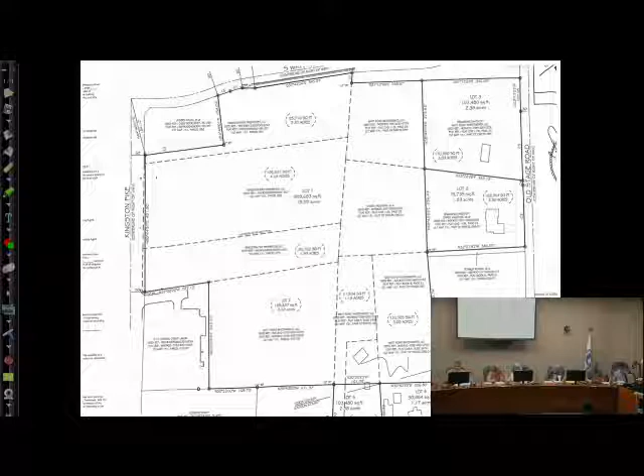Discussion and public hearing on a re-subdivision plat involving parcels 78.03, 79, 80, and 81, and part of parcels 95, 95.01, 96, 96.01, and 97, as shown on tax map 151, zoned PCD and R-1, 26.4 acres, Beginning Point Land Surveying LLC applicant. This plat is basically to combine parcels and portions of parcels that will become that planned commercial development recently rezoned a few months ago at the west intersection of South Watt Road and Kingston Pike. A small part of this is in Loudon County, very small, so it would actually have to be approved through Loudon County as well.

Another comment we had—the recommendations at your places are all doable, according to the surveyor. The one thing is, if they're not going to construct pedestrian facilities along Kingston Pike—in this case, there's a section where there is not an existing sidewalk, and the subdivision regulations require sidewalks or pedestrian facilities to be constructed along the frontages of all collector and arterial streets as part of the subdivision process. So if someone is wanting to request a variance from that requirement, you all would have to take separate action on that at this time.

The applicant has indicated to me that they will be constructing that sidewalk section as part of the site development plan for that planned commercial development. It's more or less that section just to the east of the Y-12 Credit Union and west of the Little Joe's Pizza. All the other frontages of this development have existing pedestrian facilities, even on Old Stage Road. So you will need to take separate action on that. As I understand it, they are requesting a variance from the subdivision regulations for that requirement at this time, with the understanding that it will be constructed as part of the site development.

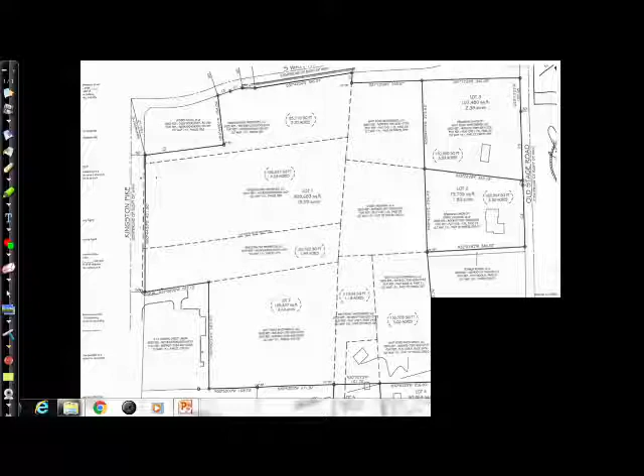Does anybody else have any questions or comments before we proceed? Applicant, could I ask? My name's Mark Balick, GBS Engineering, 1313 Calmia Road. I've already submitted the site development permit plans for next month for that parcel, and the sidewalk is included, if that makes your variance a little easier to swallow.

First you have to take action on the variance request, then we'll act on the plat itself. It's not unusual for us to grant a variance at this stage and pick it up at the site development stage. We did that with the Dollar General plat and with O'Reilly's, since they both completed facilities when they constructed the site, so it's not uncommon.

Is the applicant comfortable with the outbuilding that's on the new property line, removing that outbuilding? I think that's one of the clarifications, on lot 4 and 5. Looks pretty little, probably a little barn or something.

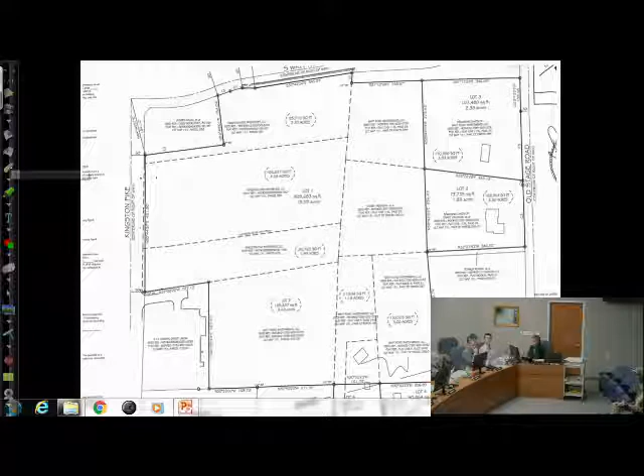Does anybody else have any questions or comments? And are you all okay with the stipulations? Can someone please say that in the microphone for me? Yes ma'am, we're comfortable with the stipulations.

I'm going to make a stab at crafting a motion to grant a variance that requires installation of a sidewalk at the plat. Did that make sense? In lieu of installing the sidewalk at the plat phase, the sidewalk will be installed at the site development phase. Is that a little more clear? Yeah, good.

Second. All those in favor? Aye. Opposed? And then for the plat itself, do we have a motion? Move for approval with the stipulations. Second? All those in favor? Aye. Opposed? Thank you.

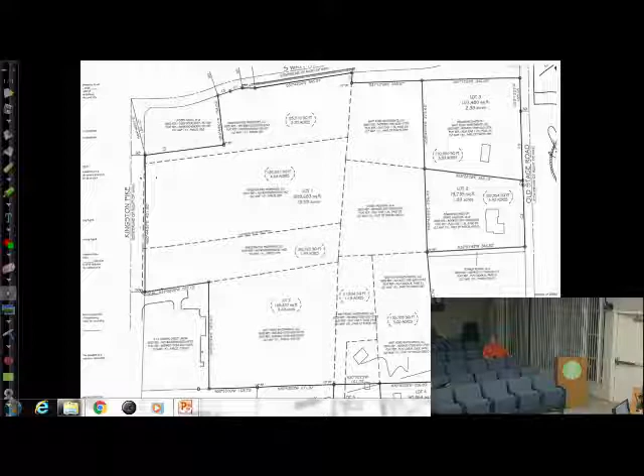Now we move on to item number 5, discussion and public hearing on a preliminary plat for the Old Stage Farm subdivision, parcel 105.02, tax map 151, zoned R-2, 5.64 acres, 9 lots, urban engineering applicant.

This is a piece of property, a small subdivision off Old Stage Road. It's sandwiched between part of phases 1 and 4 of Fort West, with house lots all around. There was a concept plan that came before you all back in March with a different developer, with a pretty similar layout. The property is currently zoned R2, and there's a different developer involved with this one.

They are proposing to construct a sidewalk on the east side of the street that would tie into a walking trail constructed to the southeast corner of the property, ending where there's a tiny corner of Fort West Homeowners Association property. That's why the trail terminates there, so that if in the future that subdivision wanted to connect Fort West into this development, that facility would be there.

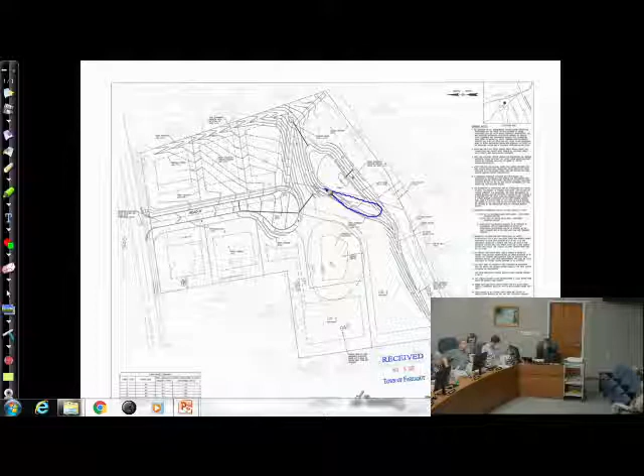What does the developer have to say about the overlay possibility? Have y'all had a chance to discuss that or review it? Chris Sharp, Urban Engineering, 11852 Kingston Pike.

We have—I mean, we'll take the time to explore an OSR overlay. It'll just be a matter of whether or not the house plans basically make sense for my client, and they may or may not. I haven't evaluated that yet. As far as the detention easement being on the private lot, I feel confident we can revise things to eliminate that concern.

That lot's a pretty big lot, so you should be able to tighten it up, since that's really just where your driveway is going to be anyway. Tighten it up right there, and it still has plenty of buildable footprint for your house. I missed that too on my end, to be honest. It's not prohibited, but we've found it's not a good idea to have those detention areas on part of a house lot, because people are ignorant about what that is and what their responsibilities are, frankly. So it's better to try not to do that.

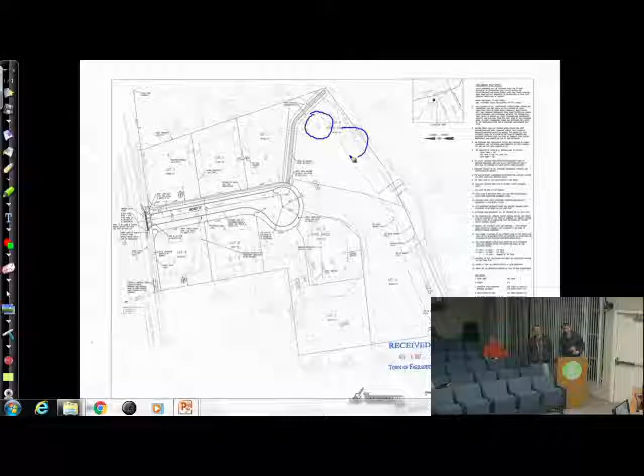What about the trees? Our focus initially was on two trees down near the southern end of the property, where the creek is the property line. My initial focus was saving those trees, and I think our grading efforts will stay out of the drip lines of those trees—they're large, I don't remember the diameters, but I can't hug them. Ideally, we knew that was going to be a common area where stormwater was, and it'd be a nice opportunity to create kind of a park setting, some common area that could be an amenity for the development. That was my primary focus.

The one closer to the road on lot 2 will be more problematic because we have topographic constraints. Not saying we won't try, but I don't know until I take a further look at it. You talking about the cedar tree?

No, ma'am, the one next to it, the big oak. There's a tree? A large oak tree. It's a really amazing tree. I was surprised - when I went out there, it's massive.

There's quite a bit of elevation change between where we're proposing the road and that eastern property line. So I can't make any promises, but I promise we will look at it.

Well, the reality is when you want to build a house there, that tree's got to come down. You're going to be in the drip line of the tree. It just is what it is. I remember the gigantic tree that was at the entrance of Wentworth for years, right there on the first lot on the left. It was a magnificent tree, but it's somebody's lot.

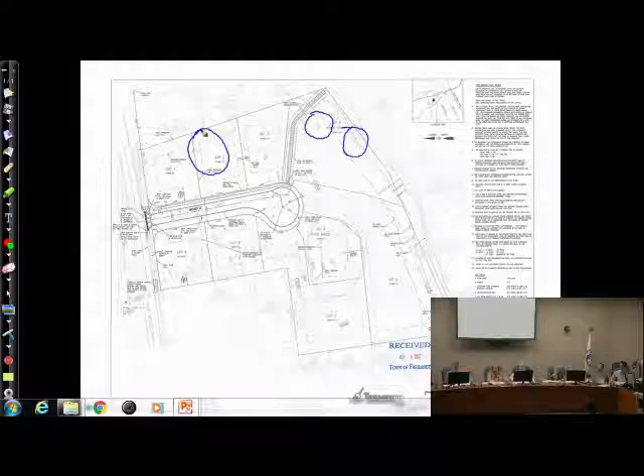Been there a while. We're Ray Keeney with Ray Keeney Construction, 12422 Union Road. We'll try to design a house plan around it.

We're working on house plans now, and that's why we didn't want to go. We'll look at the OSR, but we've really already got house plans kind of designed for it that work really well on those lot sizes. But we'll look at it and have Chris draw something up and see.

That's not a cheap tree to remove, whether you're doing it pre-construction or post-construction. It's still going to be an expensive tree to take down.

It's a great tree, and it'd be great to save it. I'm sure it'd be a selling feature.

You got an arborist involved to maybe give you some advice during construction. A lot of times you can go almost halfway into the drip line if you have a plan by an arborist to help, and he may look at it and say it's got some serious health problems that I don't see.

Well, he's right, Mark. Sometimes those arborists can say, hey, if you do some root pruning, there's certain techniques they can use to prune those roots so you can get in there. Now, if you're trying to put a big basement in, it just is what it is - you're moving a lot of red dirt.

But we'll kind of leave that up to you. Obviously, we'd like to recommend if any way you can save a big tree like that, you should. I think you've done a good job trying to work around that.

A lot of folks have looked at this with that sinkhole and trying to figure out how to make it a nice little neighborhood, and I think you guys have done a good job. And quite frankly, I kind of like your tightened roads, a little bit smaller roads, and that's kind of what we've talked about as a planning commission.

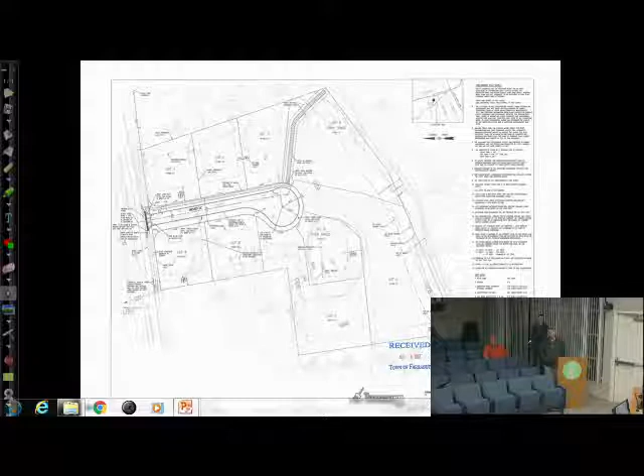Well, the reality is you're already compatible with the zoning. You've designed within the constraints of the zoning, maybe with the exception of the road width, so it'd be really tough for us to just say no, you can't approve this tonight. But again, we'd like for you guys to spend some serious time looking at it. It would reduce your lot size and maybe increase your density, you might be able to get a couple extra lots in there. Again, you'd have more open space, but you've got quite a bit of open space already. We just want to make sure you have the option, we'll leave that option up to you.

Any other questions? Are you okay with the subject-tos here? I have one more question. I'm curious as to why you selected Lot 4 for open space.

Probably for the detention, I assume. Yes, that's correct. The large stormwater detention pond is on Lot 4. Isn't that just generally the low part of your property? Yes, that's correct. Water wants to go downhill, so that's where most of that pond's there. The trees are right there too.

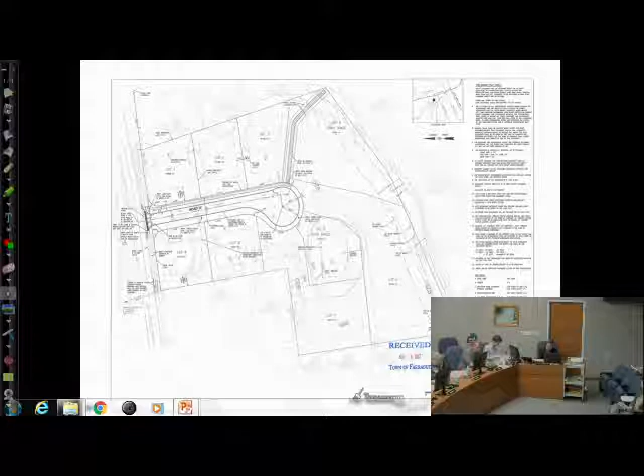Any more questions or comments? Requesting the variance for the street width because the street cannot be connected, it can't be extended, so your traffic counts are not going to change on it because you already have a build-out condition around it, and it's short. You're only looking at at most 70 to 80 daily trips on that street section, and so that's why they're requesting the more narrow lane width.

Because of the context of the setting, which I personally support their request for the variance for those reasons, I think it makes sense. Are you and the fire marshal satisfied with it? Now that it has a mountable curb, where they can actually get over if they need to get around. Yeah.

Any more questions or comments? Do we start with the variance? On the variance, anybody in the audience have anything they wanted to add or questions about this particular agenda item?

Then I'll take a stab at this variance, maybe I'll do better than I did on the last one. How about a motion to approve the variance to permit 11-foot lane widths rather than 13-foot lane widths? Second? Second. All those in favor? Aye.

Aye. Oppose? You need to have a reason. Reason being is the short distance of the road, the traffic count, and the inability to connect that road to another road in the future because of the context. This might be a little less wordy. All right, I got it.

Okay, have a motion on the preliminary plat. I make a motion that we accept the preliminary plat as presented, with the understanding that you will look at the possibility of the OSR and come back if it's feasible, and subject to acceptance of the subject which you agreed to, correct, and noting the mountable curb as shown on the drawing, it is on his revision. I'll second that motion. All those in favor? Aye. Oppose? Thank you.

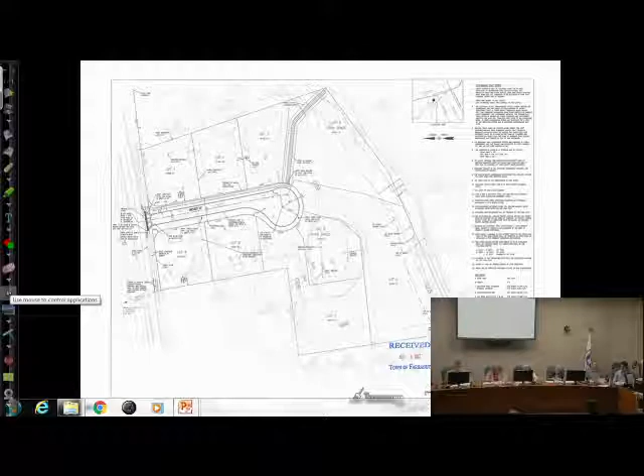Item number 6, discussion and public hearing on a request for a right-in, right-out access onto Kingston Pike associated with the new office building at 12640 Kingston Pike, Zone C-1, 0.68 acres. GBS Engineering, Mark Balick, applicant.

This item relates to our driveways and other access ways ordinance in the municipal code. As you know, access onto non-local streets, streets that are collector and arterial, have to be approved by the Planning Commission and the Board of Mayor and Aldermen. One of the objectives of that ordinance is to have better control over access points on heavily traveled streets for safety and functioning reasons.

This particular site was the site of a former Weigel's convenience store. It's at the east intersection of Way Station Trail and Kingston Pike. The lot is substandard in size, less than an acre. It has about 160 feet of frontage on Kingston Pike and about 170 on Way Station Trail. The site plan will be the next item on the agenda, and it's shown on the screen there.

They're proposing a small office building on this property, utilizing the relaxed front yard setbacks that we have now in the C1 that we provided for a few months ago with some text amendments. As part of this, they're also requesting a right-in, right-out access onto Kingston Pike.

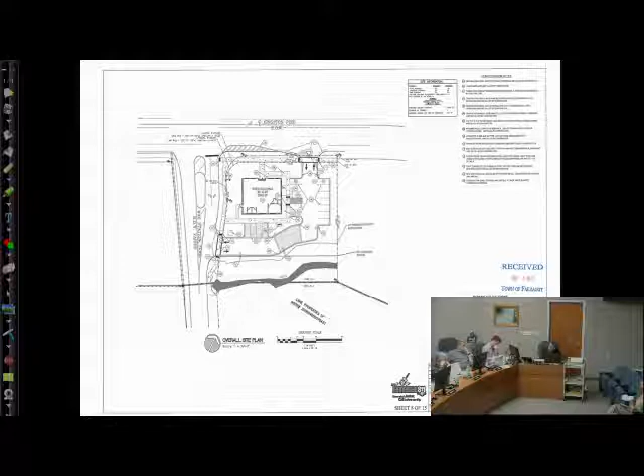It's a conflict with what will happen on the north side because people might turn out right, but then turn immediately left to get in. Maybe they're trying to avoid some stacking on Way Station. He had a concern about having any kind of access there because of its proximity to Way Station and what might happen when that's signalized on the north side.

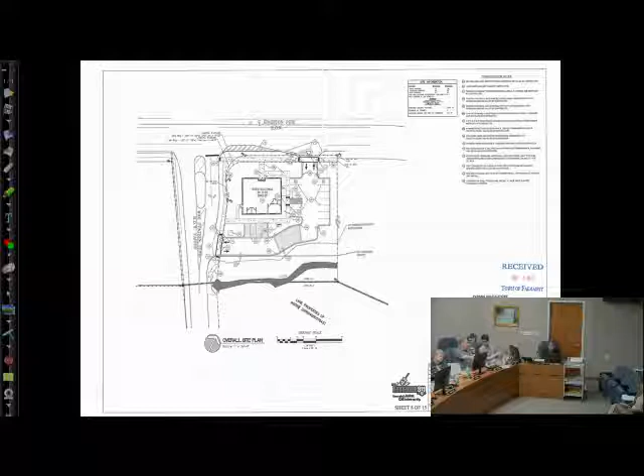What he's concerned about is when people break the law, not following the rules, and unfortunately people are going to do it. I see people turn, believe it or not. I about got hit by a guy turning out of Brookline onto Kingston Pike, right by the China Pearl.

Somebody was trying to exit there. Wow, so you can't design for that. You can't fix stupid. But the access point I envision, them coming out right, going east, is going to be a problem — immediately trying to get over in the left lane and make a U-turn to go back west.

In that curve. So you're saying Daryl's not comfortable with any kind of design that even allows an egress there. It just seems like it would help, like a fire truck or ambulance, or deliveries — I asked him that. I didn't really know either, but he wasn't comfortable, just because of its proximity and the future condition of that intersection. Plus, as Rita's already pointed out, the precedent setting.

All of these other issues matter to me, but the precedent setting is substantial — that would be a variance, and I don't think we want to put ourselves in that position in the future.

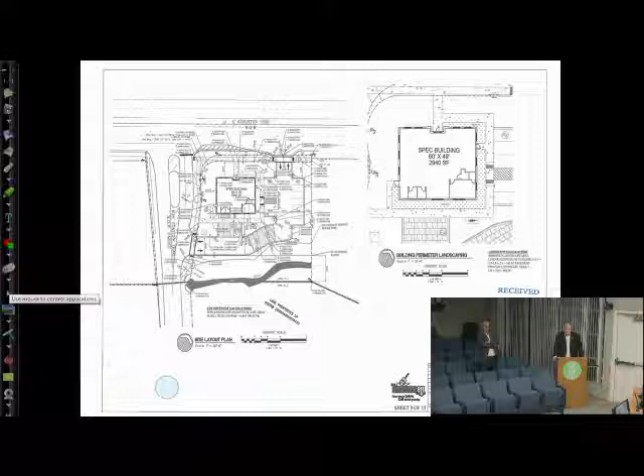How would you introduce debris into it? Just like the downspouts is probably the only way—like the gutters or downspouts—that'd be the only way I know of. It's not going to go through the porous paver. The porous pavers will let some fines through that can fit through the gaps and the porosity of it, if it's like a real fine clay, that may get some down in there. But the chances of it getting all the way into the chambers is very little, because it's got to go through the stone first—it's got to go through the porous pavers, then the stone, and then it's got to come up into the chamber.

But it does make it a lot better and safer designed from a standpoint of inspections. And the vendor has asked me that once we get this installed, to write a paper on it, because the city of Chattanooga is looking at this as a possibility of something they would recommend. Are you implying that you'll probably go with the Terra Arch then?

Yes, I'm probably going to be changing to the Terra Arch. It's exactly the same—the calculations are exactly the same. It's just a different product, that's all it is.

Sounds like a superior product. It is a little more expensive though, too. But the nice thing about it is, from a construction standpoint, you eliminate the possibility of the chambers crushing during the filling of the stone, and you add the additional advantage of inspection, the larger port—because with StormTech, the biggest inspection port is 12 inches in diameter, so the only thing you can get down there is a camera to inspect anything.

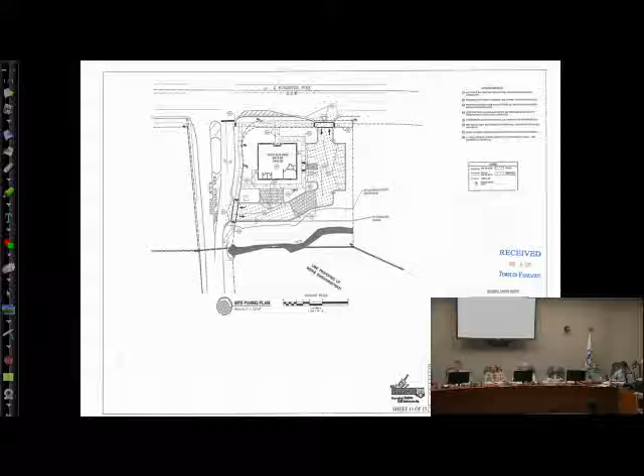We first came with a site plan of totally redoing the Weigels building in place, and totally redesigned it. I didn't bring pictures of it, but it actually was a more attractive building than this. But we had a little bit of disagreement on the definition of building with the BZA.

Well, they said anything under roof, and then they said the canopy was not under roof. So that caused a problem. And so then we came back with this other option, doing something additional on the front.

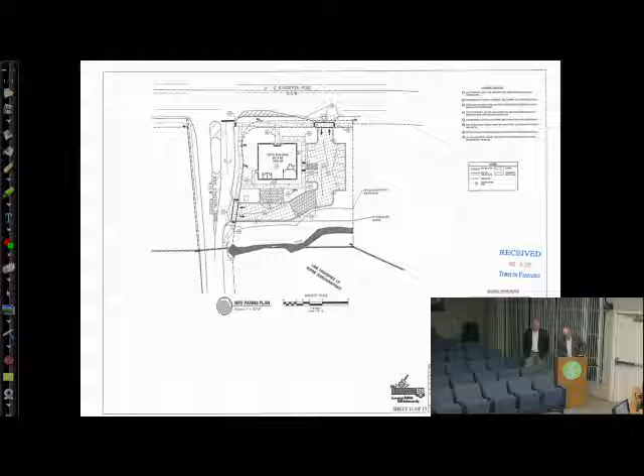Along the lines of this, I may approach. We're not that formal, Trent. Yeah, I had one question.

That was kind of a recommendation that I had as staff developer. Was this something that your client is - that's exactly what my question is - is that something you guys are comfortable with, architecturally?

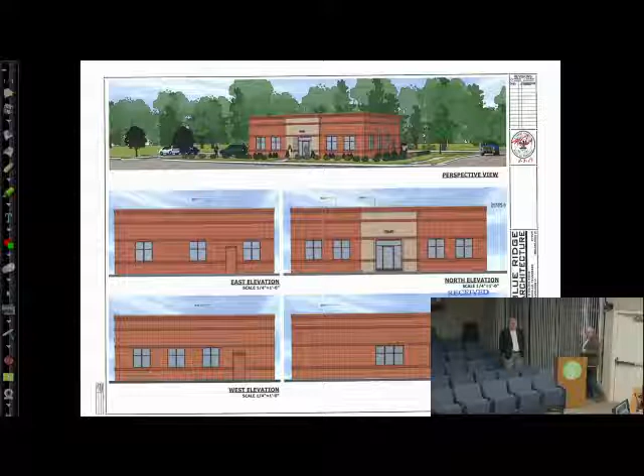What are your thoughts about that? Architecturally, we're fine with it. I mean, it's not a big deal. So that breaks the monotony.

That's exactly what my question was going to be, because in your plan, in our package, it looks like it's inset and still straight across. No, this one gives us some relief.

Well, I'm looking at the drawing, and I certainly know how to read the drawing. It sticks out 4 inches. No, right here, it doesn't. He's talking about - you guys are talking about two different things.

Ed's talking about the parapet. I'm talking about the brick - each side of that setback sits out. The white brick sits out. And then Ed's, I think, talking about the little alcove.

It's in a different plane, and then it goes back into a little alcove. I see what you mean, but you've also got the cap - I don't see it drawn - that's up higher, isn't it?

Yes, I like that because it would break the monotony of it coming across straight across the front. Exactly, it seems to me this is exactly what my recommendation would be.

And I think to me it gives us just enough relief, an iconic element, so it doesn't look flat across. Okay, I mean, we have no problem with doing that. I'm happy with that. It gives you a little bit of oomph.

Did you guys see that? That's much better. That will need to be given to Mark because we'll enter that into the record, so it's important it ends up down there at Mark Shipley's, because that's part of our approval process tonight - know what I'm looking at on resubmittal.

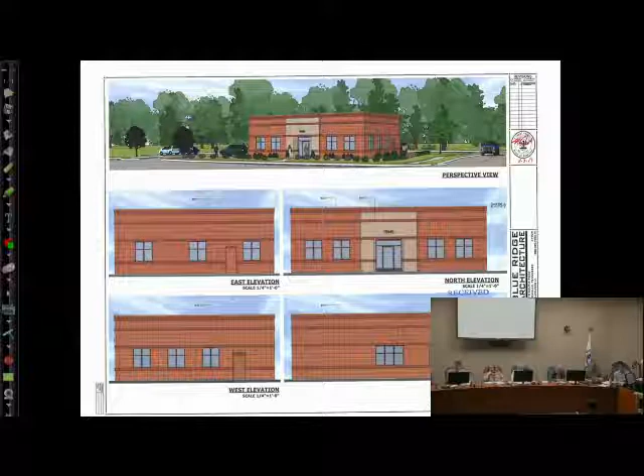I think we're past architecture. You guys want to talk connectivity? Connectivity with your neighbor to the east, or what may or may not ever be developed there? Well, I'll talk about that just a little bit, real briefly.

So you got to look at the context to what they're asking, to not have a connection in the context of this site. Because, as Mark shows in this handout, the property to the east, which is actually about over 9 acres, goes all the way up the hill and backs up to Old Stage Hill subdivision. But there's a stream that runs in behind the Weigels property, and then it kind of goes at an angle as you go to the east.

Let me see if I can draw. I'm just trying to outline what their logic is. But it kind of goes at an angle. We gave everybody a map right here. I just want it for the public, since they don't have the map.

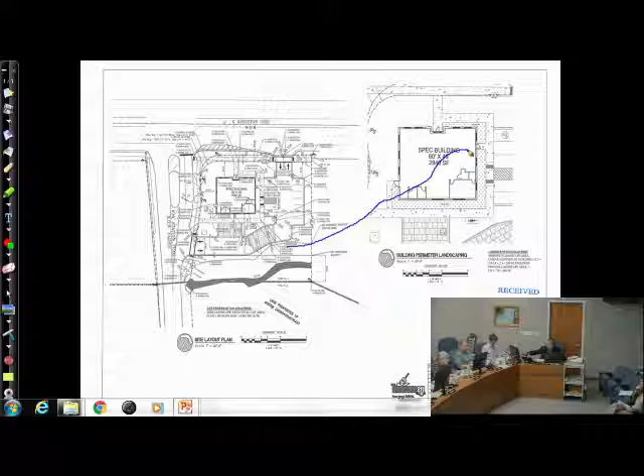So it goes at an angle, leaving you with, at least on the north side of the creek, a very small area. Once you figure in all the aquatic setbacks and lose everything, it's about 2/10 of an acre. Very difficult to do anything with. I'm counting contour lines in there, and there's nearly 100 feet of fall from the top to the bottom.

I can't conceive the day that this would ever be developed. Not to say that it can't, but it's cost prohibitive to develop due to the topography. And really, the way those dash lines are, they actually show a sinkhole. Now, it may have an opening because of the culvert down there, but those hash lines are showing closed contours.

I think in the context of the setting, staff is not opposed to not having a connection here, because if you look at the bigger picture, if that property to the east ever develops, realistically they're going to have to try to get access into Way Station Trail on the south side of the creek. So I don't really see that little triangular area as anything happening to it. The only benefit it could possibly have is for this property to acquire it and incorporate it into theirs, but that's the only entity I see it has any value to.

Well, that's not my decision to make, I'm just pointing that out. I think given the context of this setting and what you're connecting to, there's a reasonable argument for it not being required as part of this site plan. I agree as well. We would never allow a lot that small to be individually platted. And if the applicant wants to purchase that from the owners next door and come back with a site plan at a later date for extra parking, they could do that. But I just don't see a need for an easement that's just useless.

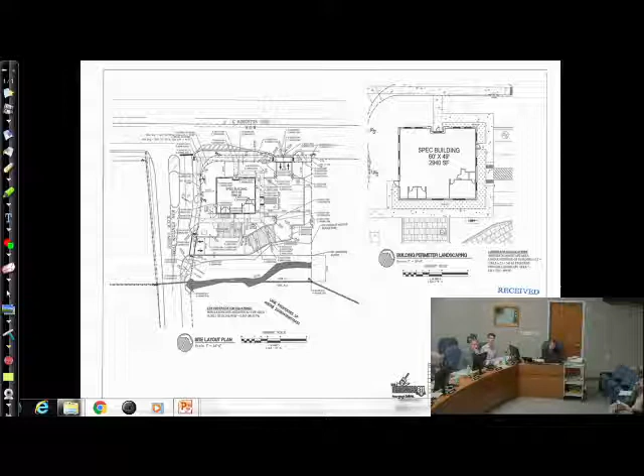Does that require a separate action item, Mark Shipley? No, it doesn't require a separate action item because it gives you that flexibility for it to be context based.

Any more questions or comments, or anyone in the audience have a question? I don't know if there were any other discussion points other than the staff subject-tos, and we're okay with that, included in that. I mean, obviously the issue of the right-in, right-out will have to go in front of the Board of Mayor and Aldermen, but if it gets denied, we'll work around it and keep going forward, try to get it approved subject to.

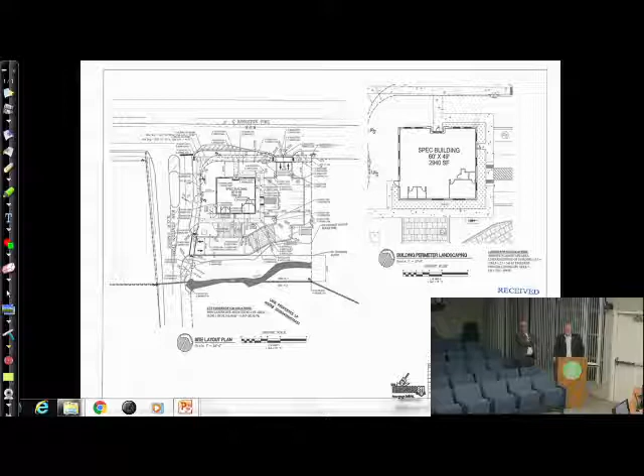We still feel it's a life safety issue that we don't have two means of egress out of this site.

We give up the right-in. Understand, yeah, that can totally go away, that's fine, but being able to get out, get fire trucks around, ambulances around. Well Trent, keep in mind your application was for a right-in and a right-out, and that's what we denied, as presented in your plan. Yeah, which we would probably come back with just a right-out. We understand, you'd have to go back to them, wouldn't you? Otherwise we're agreeable to all the rest of the subject-tos.

Okay, any other questions or comments? Mark, do we need to change anything in here before we make a motion, or an amendment to the building elevation? Okay, per the discussion, do we need to take out the language where it says landscape professional?

Yeah, that's fine, please. I'm fine with that, even though... I understand, don't make my nephew mad. Don't try to block you in. Give you the... I've seen his nephew's work, it's a lot better than a lot of LAs that I've seen. I thought you were about to say it's a lot better than mine.

No, LA, landscape architects, it didn't say registered or licensed. Yeah, licensed landscape architects, yeah. Okay, are you going to take a stab at all this, Ed?

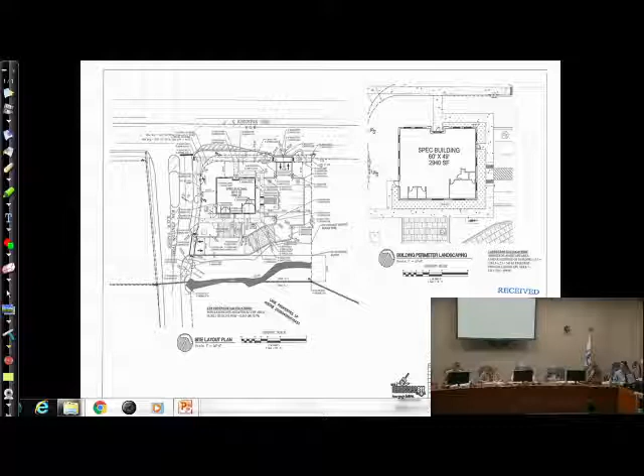We'll put his name Travis in there. That would make them happy. That would make him happy.

All those in favor, say aye. Aye. Opposed? Thank you, thank you.

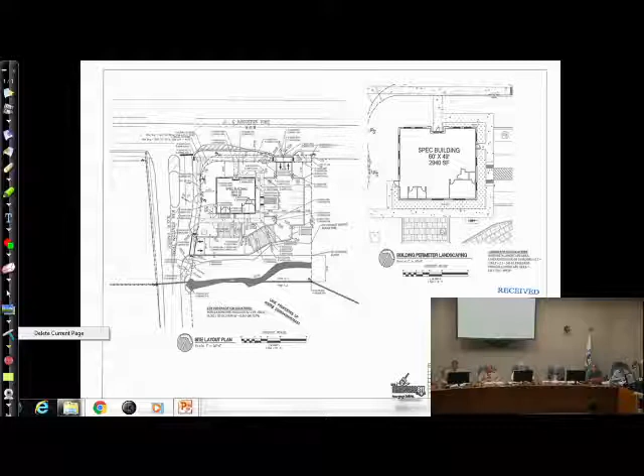Okay, item number 8, discussion and public hearing on a request to correct an error in the zoning designation for property at 12603 Evans Road, to change the designation from R-1 rural residential to A agricultural, town of Farragut.

We discussed this last month as a workshop item. There was an error made all the way back in 2003 when the Farm at Willow Creek was rezoned, and some of the properties around it were also rezoned. This particular property was accidentally changed from agricultural to rural residential. The owner found out about it and has asked the town to revisit that and have the correction made so that he has the agricultural district restored to his property. Staff is recommending approval of Resolution PC-17-10, which recommends approval of Ordinance 17-18 to correct this error.

Mark, do you have any idea, is this section in front of it R-1? Yeah, everything is R-1 over there on the north side of Evans Road, and all that used to be agricultural. I don't know what happened there. It was obviously 14 years ago, and I have no idea how that happened. You were just a kid then. I was not a kid, but I was younger than I am now.

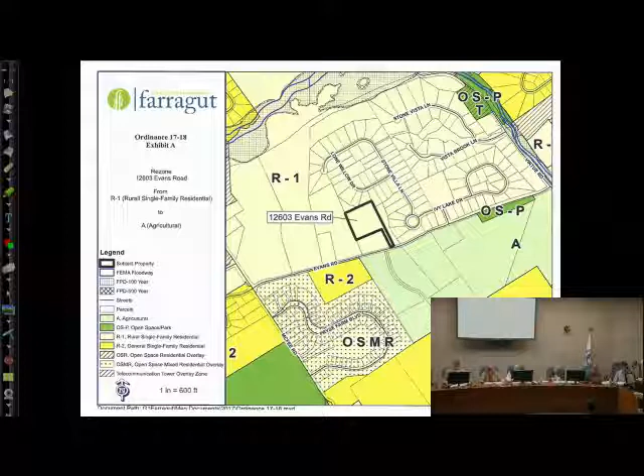I'll make a motion to approve Resolution PC-17-10, which recommends approval of Ordinance 17-18. Second. All those in favor, aye. Aye. Opposed?

Item number 9, discussion on a concept plan, and this is for discussion only, correct? Yes. Discussion on a concept plan for a restaurant proposed on parcel 63.08, tax map 151, western out parcel in front of Renaissance Farragut, zoned C-1, 1.34 acres, GBS Engineering, Mark Balick, applicant. Madam Chairman, I am involved in this particular project and I will be recusing myself from the discussion and any subsequent future votes on it. Thank you.

Okay, this is a concept site plan, which we don't really have a concept site plan application for, so it's just one sheet. Really what they're wanting to do is just get your all's thoughts on some of the macro issues that they need guidance on before they start spending a lot of money on the design and development of the property. This is the westernmost out parcel of the Renaissance, it's smaller than the eastern one.

It's only 1.36 acres, and it actually has a lot of physical constraints. There's a stream to the south side, a drainage way on about the eastern third of the property, and to the west there's a very steep drop off for the adjoining property. So it doesn't look constrained from the street, but once you walk the property, it's pretty apparent that it does have some natural limitations potentially, or opportunities, however you want to look at them.

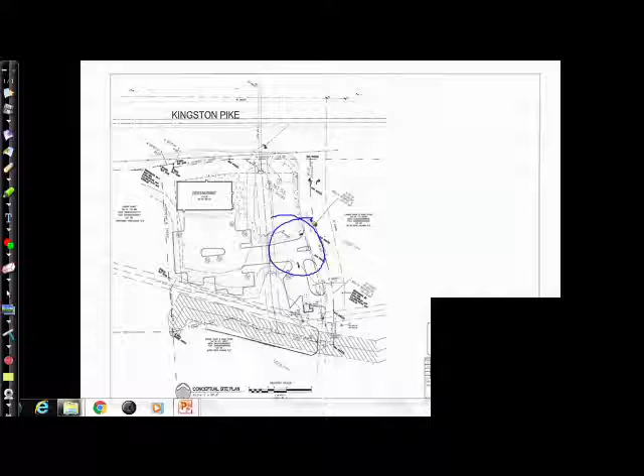So those are some of the things to think about. I don't know if you wanted to just talk about these individually, or if you want me to go through the different discussion points that staff thought about with the applicant, or how you want to deal with that. You want to just talk about connectivity first and have a discussion on that?

I'd like to, because I'm a little bit in the dark here. Making a physical connection to the west at this time, other than at the very front of the property, would be very challenging. From the back, it looks like it would be very challenging too. You've got a sanitary sewer easement, and you've got the stream back there, so you've got the aquatic buffer in the back. There's really small space in the front, small space at the front of the building, right? Yeah. That would take away from the desire to put the building closer to the road. It would, yeah. So you've got to kind of balance those things.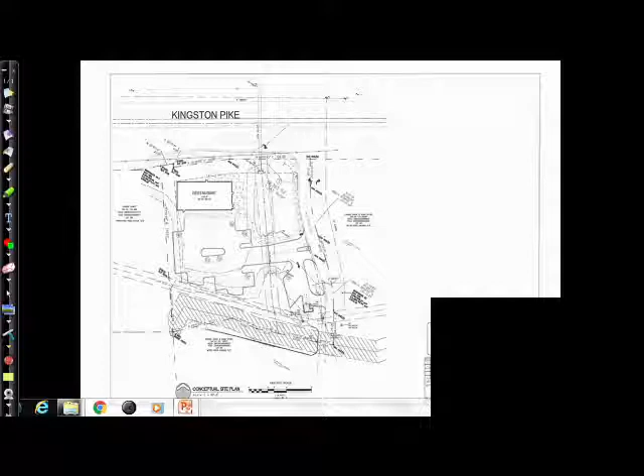I think what you could do, just planning for the future, if you all felt this was an appropriate action and the applicant was in agreement, was at least plat some kind of an access easement somewhere along that western property line where it might make sense, should conditions change in the future, so that we're not eliminating the possibility of a connection happening at some future date. Of course, that connection would affect another discussion point we have on parking, because you would have to take at least a couple of parking spaces out if you made a physical connection in the future.

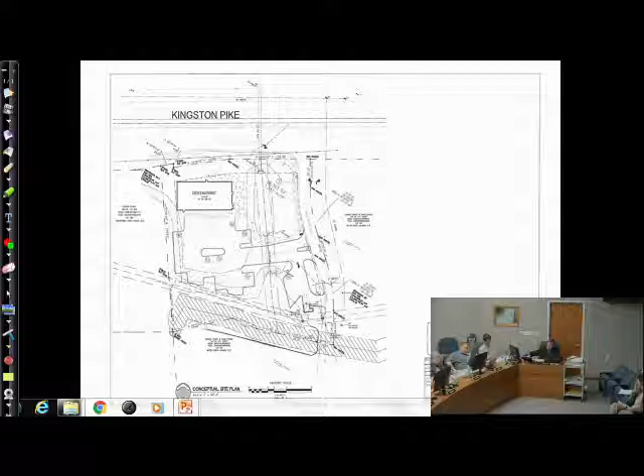I guess what I'm talking about is stubbing out an access easement, kind of like what we did with the O'Reilly Auto Parts, where it really didn't make any sense in the present time to have that because it's a huge ditch and it goes into the county. It's similar to that in this context, but at least you wouldn't be nullifying the possibility of that happening in the future, should that be desirable.

Mark, can I make a suggestion? In lieu of platting a line showing an easement, could they do a note that says if at some time in the future the adjacent property is developed, both parties will agree to discuss a cross-access easement, and at that time, if it's mutually appropriate for both parties, agree to a cross-access? Use a note instead of a line on the plat? You're still ending up with the same situation, but at least that way you don't have a line that has to be moved or whatever.

It's just a note. Yeah, that, or you just plat a generic access easement. You're still drawing a line. Yeah, maybe, I don't know. You could still make a note that goes with it. It's not a well-specific location, it's shown for location information. Every time I've drawn a line on a drawing, I have to put a note in there.

In a situation like this where you're trying to predict the future, it's always 100% of the time in the wrong spot. I don't disagree. I'm just saying you might be able to put a clarifying note that goes with that, saying it's a general location. That's why I would rather have a note that says the same thing you're trying to do, but it gives the current property owners, the Myers brothers, and the adjacent property owner the ability to discuss it and create something that is mutually agreeable to both parties. And it still gets the connectivity that you're looking for.

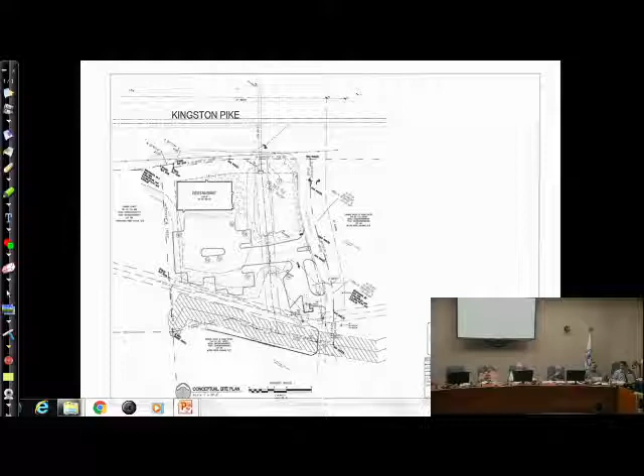But we wouldn't have a problem complying with the 400-foot distance between access points - they could get an access point 400 feet from this access point.

What about, and I'm playing devil's advocate, but what about from Old Art's Barbecue? Well, that's way further west. I measured it on KGIS, and there'd probably have to be a small variance granted for a driveway cut somewhere along that property in between the two, but it would be the only means of ingress and egress for it.

Yeah, because there's that business down there - the florist is next to it. I have not looked into it at all, I was just asking a question. It's kind of a free-for-all right now down there. I'm more in favor of no connectivity at this time.

How's the rest of you feel about that? I am too, and you're going to check with Tom about it. Yeah, I can check with him about options that we might have to provide for that in the future, should that be desirable to both parties.

Mark, separate question. Yes sir, on the entrance shown to the south, or an exit I guess, because of the way the arrow's drawn, there's a few parking places. What's going on in that area?

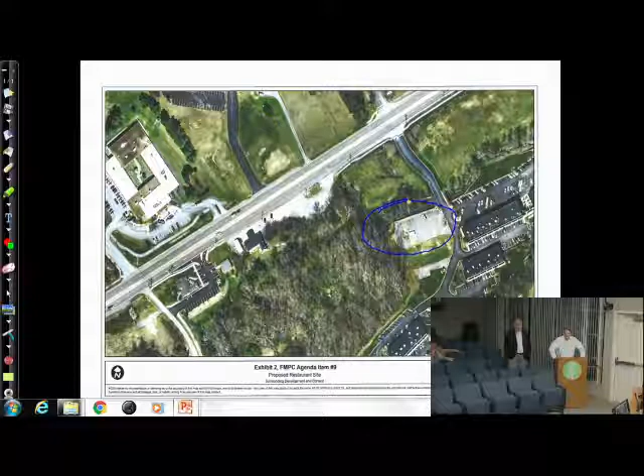Well, in your case, it's not like you're the insurance company next to Albury's, for example—you all have some integrated control over that area. I don't think it's a question in my mind of adequate parking, it's the location of the parking. That's why I was asking about the convenient drop-off. The convenience of the drop-off, because I agree.

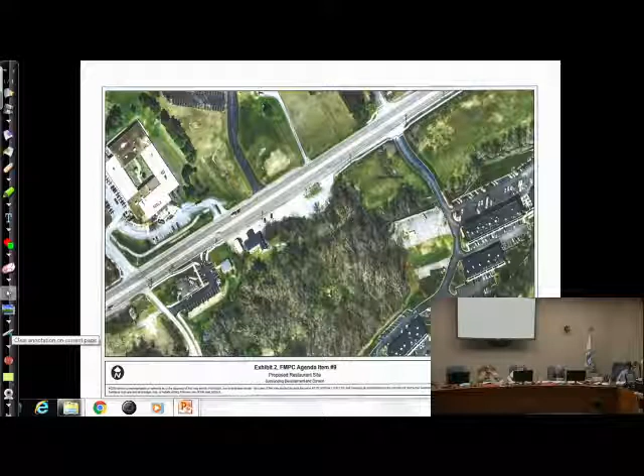I agree with what you're saying. I think, in a utopian site, we have ample parking but not overparked. We have plenty of trees, but not too many trees. We have a place to drop off, but we don't have a sea of asphalt. So we start out a project with all those goals and do everything we can within the constraints of the property to create the most efficient design possible. Is everything we design perfect? Absolutely not. But we think they're absolutely the best design they can be within the constraints we have.

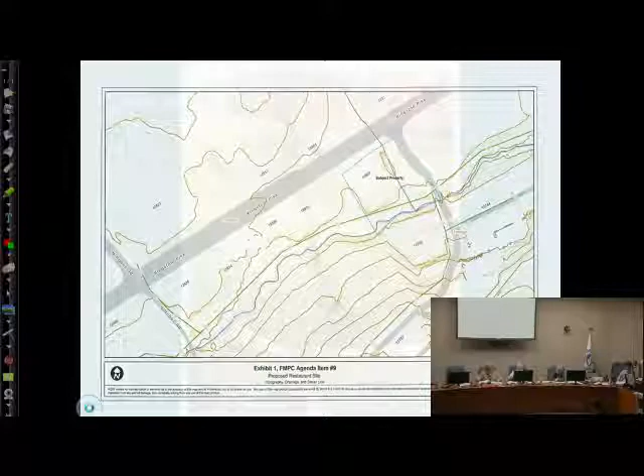So when you pull in the driveway off your access road there into Renaissance, the natural flow of a drop-off would be to the right as you come through the driveway there, toward the handicap spaces, like Mark said. And then is there going to be ample room to turn there, to get back out?

Well, let me throw out something. We had talked a lot in the office about what I'm getting ready to propose, and it's kind of hard to explain, but I'm going to do my best since you've opened the door here.

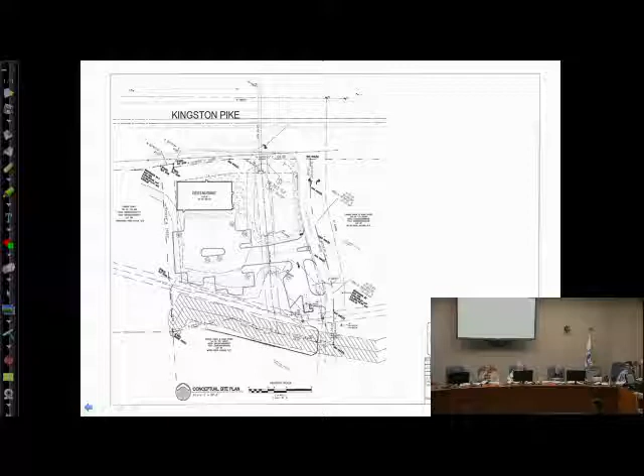If the front setback of the building in the new C1 allows us to be 20 feet from the property line—and it's kind of funny because we're the ones that requested and carried that text amendment through—well, the first time we go to use it, we have this funny constraint, and I'm going to try to explain it.

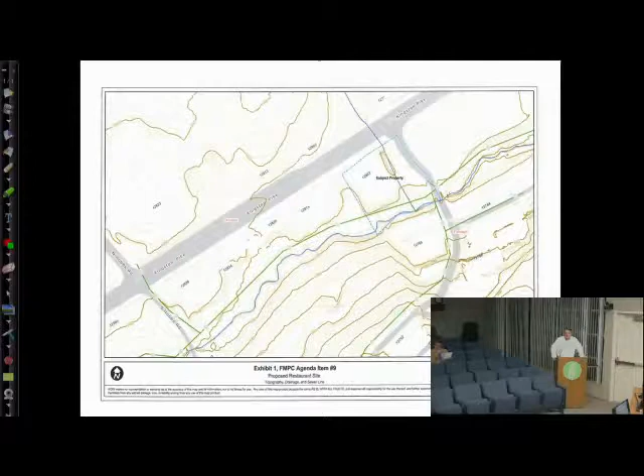The TDOT way station that is predominantly to our west, on property we don't own, does in fact bleed a little bit in front of us. You can see how Kingston Pike runs at a plane that's straight ahead, and the right-of-way—the way my brother explains it—if you think of a bulge in a snake right after they've eaten, there's this bulge there. And it has pushed our building.

If you look at the northeast side, we are 31 feet from the property line. On the northwest side, we're 20 feet from the property line. But yet Kingston Pike stays on a straight plane. If this body would entertain the idea that the intent of the 20-foot was more in line with Kingston Pike, and not these very unique situations where we have a TDOT way station where the right-of-way on Kingston Pike is artificially increased, allowing us to move the building to the north 11 feet—which would be in keeping with the northeast side—and we're not encumbering anybody, not the sidewalks, not Kingston Pike, not the utilities, then a lot of what you are bringing up we can resolve. I think that makes very good sense.

What is the right of way over there—100 feet? More than 50 feet? It's way over, Mark, in front of that property. Well, I think it obviously would be a matter the BZA would have to consider, but if that's the case, that certainly is something that makes sense to me—they could make a consideration on that. It'd make a heck of a better flow there for drop-offs.

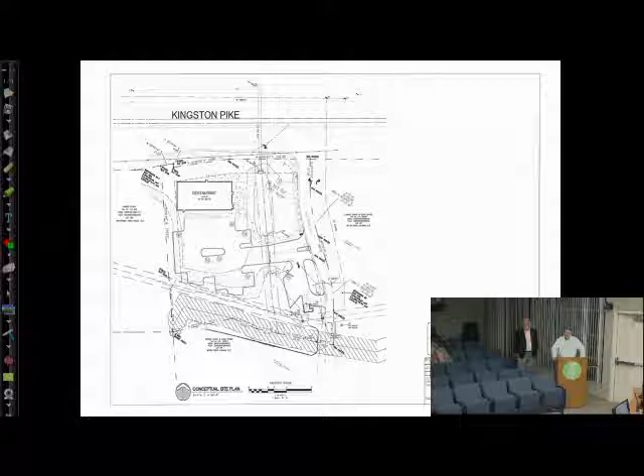Could you explain that? You could also utilize the timing wording in that section. So it might be, in other words, if you're right at your parking requirements in Renaissance, the only way you could share parking in that situation is if you could demonstrate there's an offset time issue, like you just talked about earlier. So if you've got office uses that are going to occupy those spaces during the day, but the use you're sharing the parking with is a nighttime user primarily of parking, then you might be able to use that language to take advantage of those spaces.

But you're only talking about 9 spaces. Well, no, but it's very important to me and to our kids.

Well, the bottom line is we don't lose our density. You don't want to cut off your nose and spite your face because you don't want to share parking if you've already got a site that is under-parked or is right at the parking. So if you can demonstrate that there's an offset, you may have excess parking anyway with the Renaissance, and it may not be an issue. But if you're right at it, you would just need to demonstrate that there would be the time benefit from the two users.

I was told as a kid that the greatest fear in life is fear of the unknown, so I'm trying to make some unknown known. When you say I'd need to demonstrate that, how would I do that? Would I write a letter stating the restaurant is going to peak at 7 o'clock at night? I'd have to look at the language, I don't know if it gets that prescriptive. I think the bottom line is making sure that overall, with the two entities—the site sharing parking and the site offering shared parking—neither one ends up underparked. That's the bottom line.

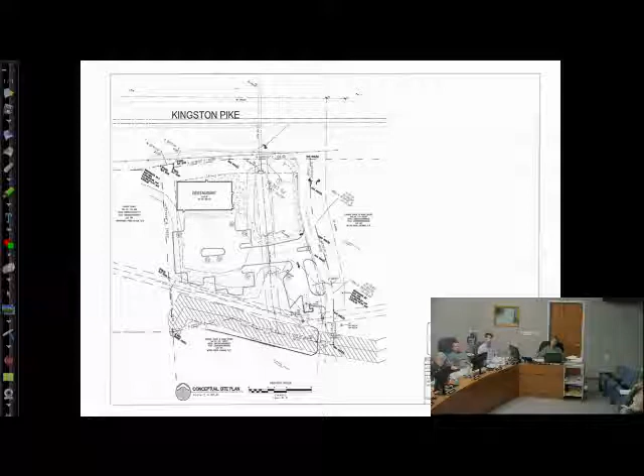No, I agree, we're obviously a mixed-use development. Unfortunately, in this business, we've turned away potential tenants who really want to be there, but their parking demand is just greater than we can accommodate without impeding the quality of life of our other tenants. But that's all part of it, and that's something we have to decide. Yeah, I agree, so I appreciate your explanation there.

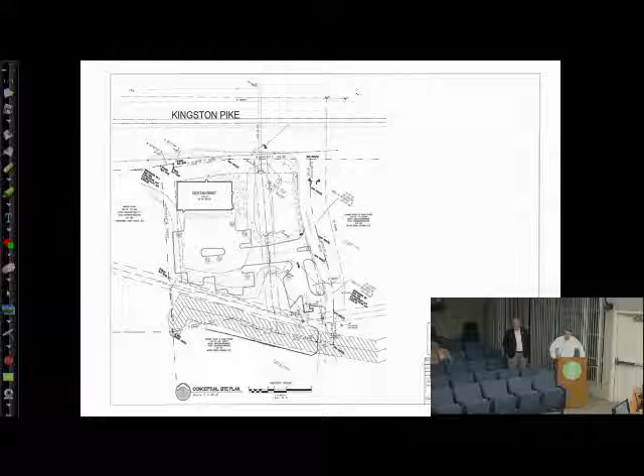The presently paved area at the rear of this lot—that's not part of this lot, is it? I think that's the area that, in our minds, is going to be the excess parking, but no, it's not part of this lot, ma'am. We have the Renaissance separated into multiple lots for a variety of reasons, but the lot we're looking at today is a standalone lot. I want to say there's about 50 spaces there, but remember, the Renaissance will ultimately be built out. I'm talking about that asphalt area on the same side of the access road, at the back of that lot. Right, I think there's about 48 parking spots in there today.

Is that also where you said the pad for future development is? Right, there is a building pad there, and we're pursuing putting somebody in that building every day. So that will be the next building we build. But think about it from our standpoint—if we're able to get this approved and built, we're going to have overflow parking from the restaurant there.

Just like we tell a tenant today, if they want to rent a space, the first thing we ask is how much parking do you need. We do that in all our developments, because no matter how much parking we have, there's always tenants that need more. So it's very possible that somebody comes along in what we call Building C that we simply cannot accommodate, but it probably won't make a difference whether we're cross-parked or not—we'll still have that same dilemma. I really believe that's a problem we should bear, and that the government's role is to make sure we have enough parking, we're doing it right, cleaning the water, architecturally correct, et cetera. But whether we're overparked or underparked, as long as we're within your constraints, let us work those details out.

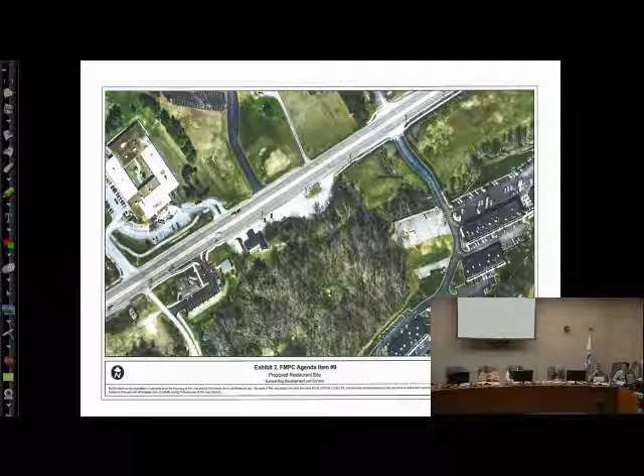It'd probably be a pretty good position to be in, wouldn't it—to be overparked, have too many customers? Well, yes, it is. Usually you're blessed to be overparked, but at that moment you probably don't feel it unless you're getting close to a breaking point. So yes, it's a very good problem to have.

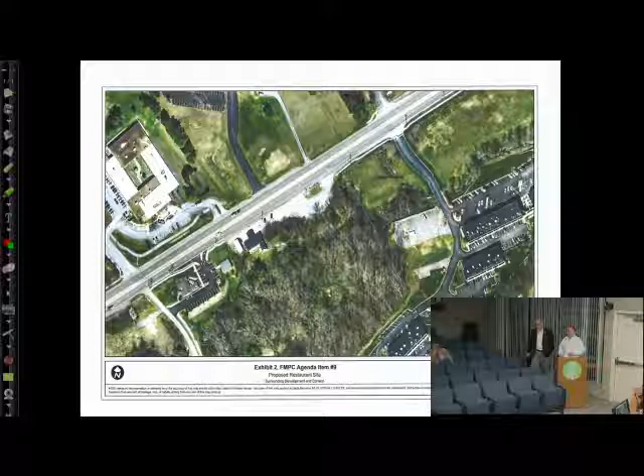Okay, item number 10, discussion on amendments to the Farragut subdivision regulations concerning standards for certain public improvements.

We can go over these. It's something that obviously we have a deficient amount of planning commissioners to really do a workshop item like this, but a lot of these things we've talked about with sites in recent months and years. And some of the things that I went through the subdivision regulations a couple weeks ago, just page by page, and looked at things in there where there might be some opportunities to do something a little more creative.

with our public rights-of-ways, our public spaces, and I included some images from other communities in your packet that are on the screen here. Most of these show, like what we talked about with that old Stage Road subdivision, a wider separation between the street curb and the pedestrian facility, to beautify that area and give a pedestrian more of a safe

experience because they're further away from the traveled way. These are just some examples of what that might look like once built out. This looks like a relatively new development with relatively new trees. You've got on-street parking here.

I have a neighbor who's a former security investigator for an insurance company. I mentioned this to him, and he said yes, from what he's seen, opening up parts of a neighborhood that normally wouldn't get as much traffic could lead to robberies and thefts in homes. I think that's a point on police too, you have to weigh the pluses and minuses.

All of your points are well taken. But I think if you're in an ambulance, the more likely emergency issues are going to be ambulatory in most situations, unless you live in a really very dangerous area. That's a whole other issue.

A few years ago, there was a person going into homes in the early evening, where people weren't home yet, and he picked homes where he could easily get back out of the subdivision onto a main road. In our neighborhood, it was homes closer to Old Stage Road—there were two or three houses that were all easy to get back onto Old Stage Road.

Same is true for our area, Waverly Court. We just have the one access in, and we've had very few issues, but those we have had were closer to the entrance and exit.

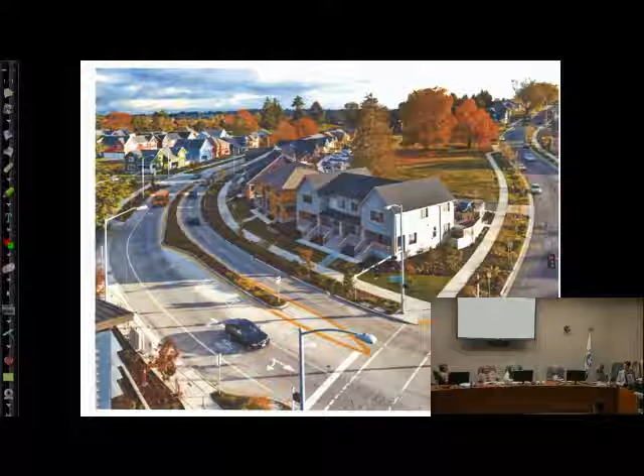Well, you may be creating a new zoning district in some cases, or potentially an overlay that gives people, by the language of the overlay, like the OSR, where it doesn't have a lot frontage minimum of 25 feet, but much less than the 75 feet on regular residential. Setbacks, maybe just look at, you have to put the building somewhere within this 10-foot area along the front that allows them to move it closer to the street.

Different things like that, increasing the density slightly, but all these things you're incentivizing, the applicant's also creating something that has lasting value for the community. It's not just somebody going out and getting as many houses on a piece of property as they can, and then leaving the area, and we're stuck with looking at garage doors and driveways.

That's not what we're trying to do. We're trying to incentivize something, try to encourage somebody to do something a little unique, something that would have long-term value for the community and the people that live in that particular community.

That's okay. Well, anything else on that for tonight, at least? I can work on the low-hanging fruit and bring that together. One more, a quick little one. On number 8, you talk about